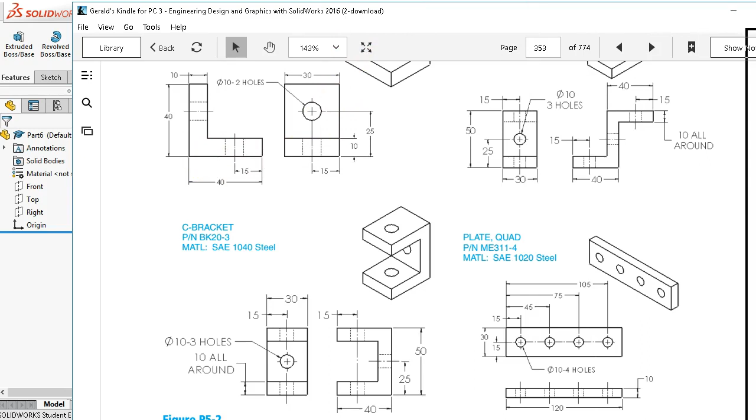Let's see, we're adding that to the outside, so that could be additional geometry. Not quite doing all of those. If we overlap them, that wouldn't hurt anything. So pretty much this 40 by 10 piece is a good way to start, or at least my first guess. Alright, so if I go into the front and open up the sketch,

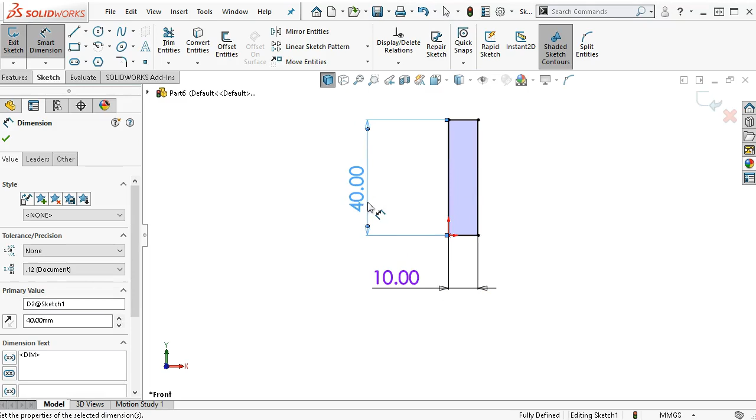and again, this is just a different strategy, a different way to approach and show some of the capabilities of the configurations. So we're 10 by 40, and so that makes all of this optional. So one of the things that I can do is with the split entities, and apparently I added one up there too. So I really like my split entities.

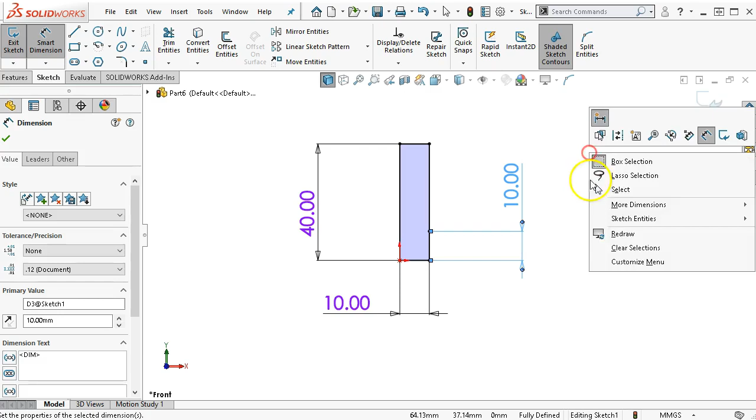We're going to split that. And then I can either make them equal or put a separate dimension. Alright, so that doesn't help or hurt anything right now. It's just to be my default base. And we'll do an extrude. And I will stay with the midplane and the 30 millimeters to get that started.

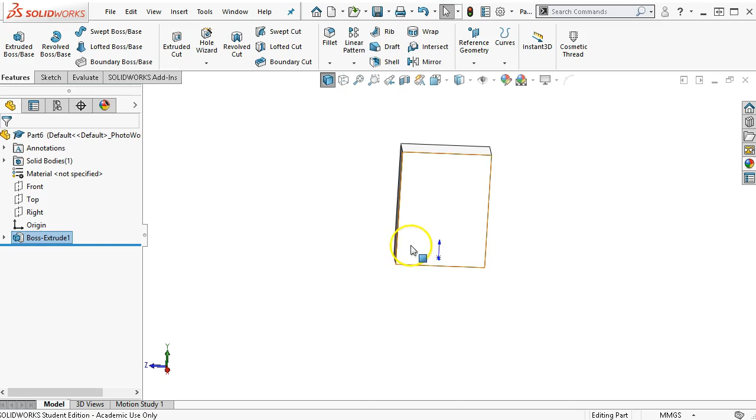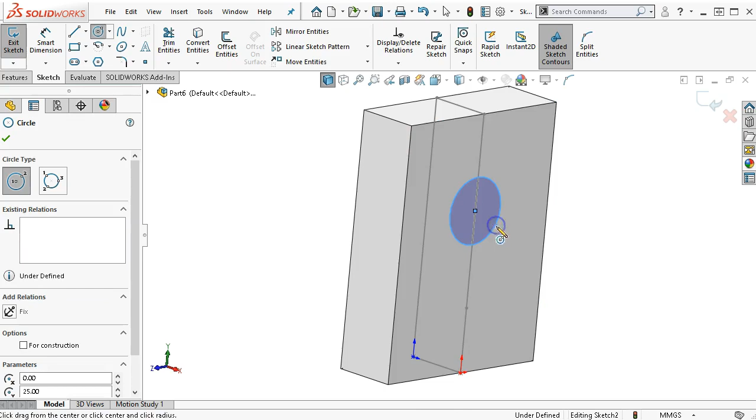Alright, and then for the sketch, so that line, even though I split the sketch and I can see that point in the sketch, it doesn't really help or hurt anything. So one of the things, if I were to show that sketch, all three of our configurations are going to have that common element in it. So we'll set, I gotta really find those properties and figure out where that symbol's at. Alright, so through all, and then that gives me my base to start.

Alright, so at this point we'll give it a save, and I'm going to call this just the generic bracket. Each of the configurations will pick up its own. Alright, so going into the mix then, the default is just my geometry. Add configuration will be the, let's go with the L bracket first. And I don't really have a description that I can think of.

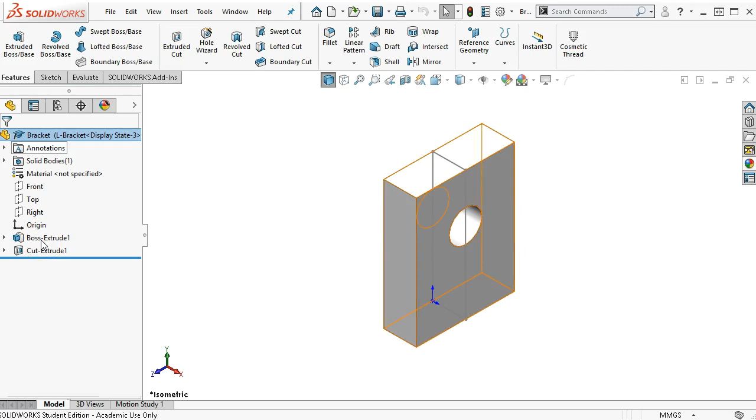There wouldn't be anything wrong with just going right down the line since I know what they are, adding them in, or coming back to the boss extrude and see if it will allow me to configure the feature and just go through and add the others, even though I'm not managing geometry at this point. And then once we hit enter, then it goes to the next line and I can do the Z bracket,

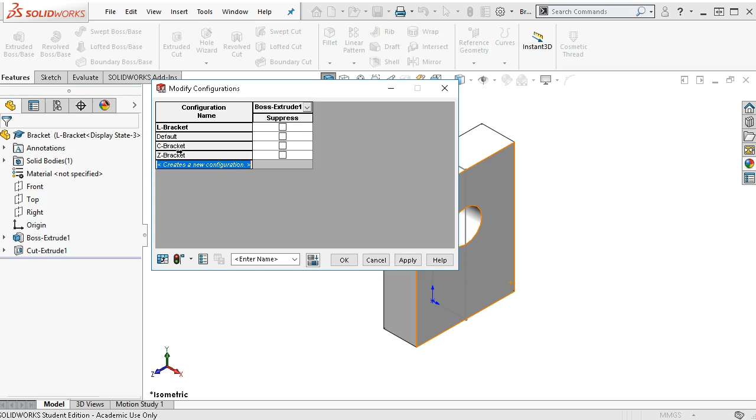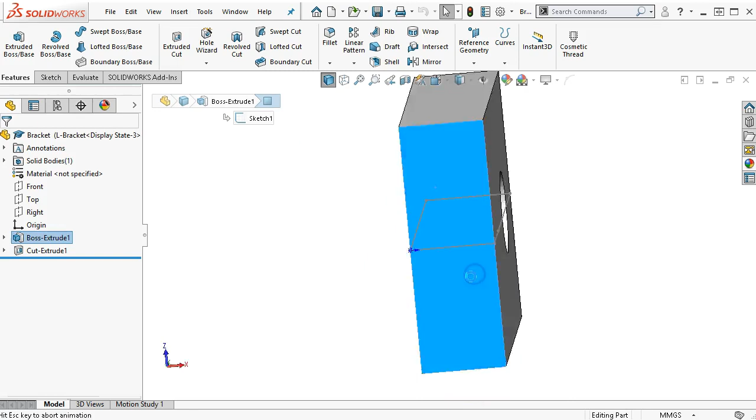All right, so my geometry for the L bracket. And this is kind of a cumulative process, and we're going to have to check because at different levels as we add geometry, they may or may not suppress correctly. So on the bottom of the part, I'm going to open up a sketch and I'm just going to utilize that existing geometry. And I don't want to make this overly complicated, so I'm not going to include the holes. Alright, and that gives me the depth of 40.

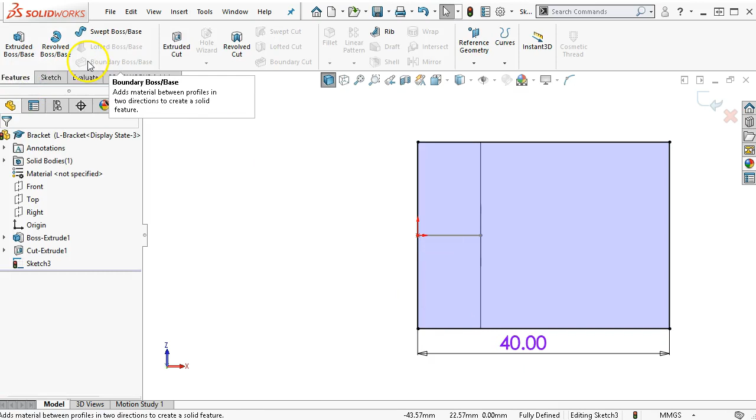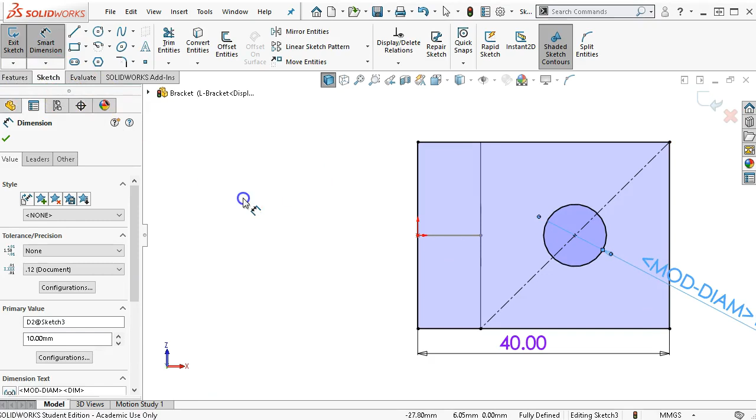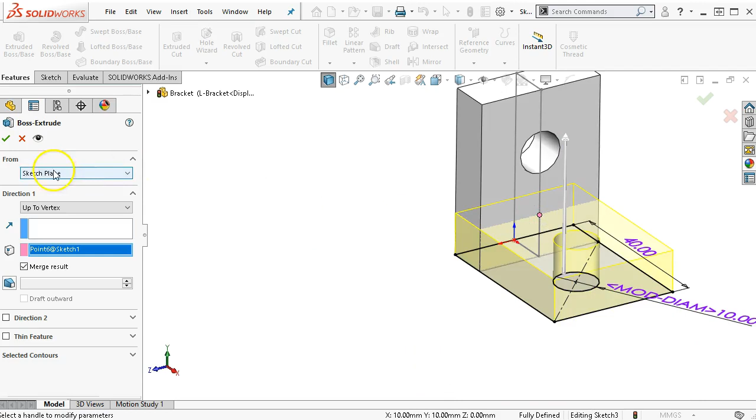Need the center line. And we'll go back for the circle and set it to 10 millimeters. And then when we create the extrude, one of the reasons that I did the split line was just to illustrate that I can go up to vertex for its height. Right, so that gives it a stopping point that is included in the first sketch and that we could drive.

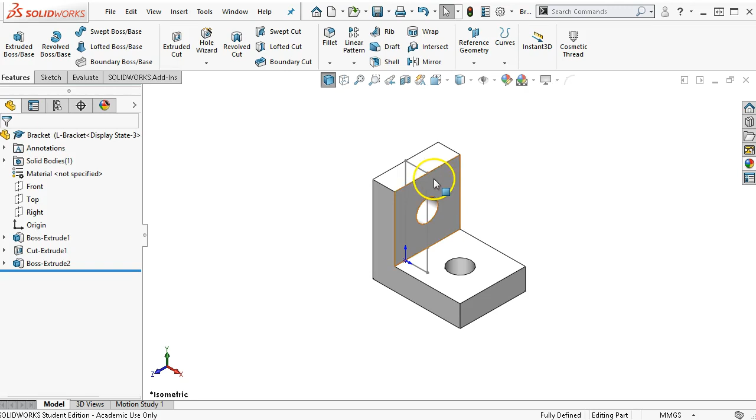So if this was a full layout, I might go back and do the contour and region approach and include a 10 by 10 at the top if I needed to draw that much. And because this is an overlap, positive into a positive, it doesn't really do anything out here. I could have drawn my rectangle right to the edge and had the same effect. It's just pretty much a what you see and how you see it when you see it kind of thing. Alright, so that gives me the geometry for the L bracket.

For the C bracket then, let's go this route, so that disappears. And that's not a surprise, depending on how we set. So I do want to unsuppress that geometry for the next. Because it was not unsuppressed, or it wasn't included in the creation of these, it's not going to be there. So if I'd come back after I'd created this, then it would add that into the next mix.

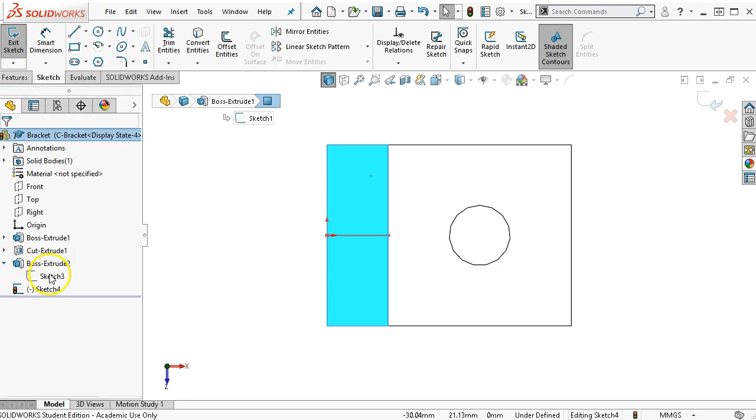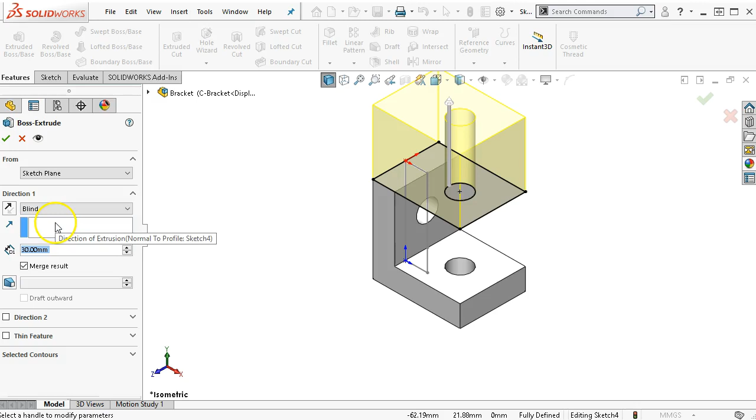Alright, so we'll open up the sketch, and pretty much, if I wanted to, I believe I can highlight sketch 3 and do a convert entities, and it finds all my geometry, and then the features. So this would have been the advantage of having that extra sketch, was to go up to vertex again. But I didn't think that far ahead, and I don't want to go back and generate it now, so we'll just put in the 30 millimeters for the height.

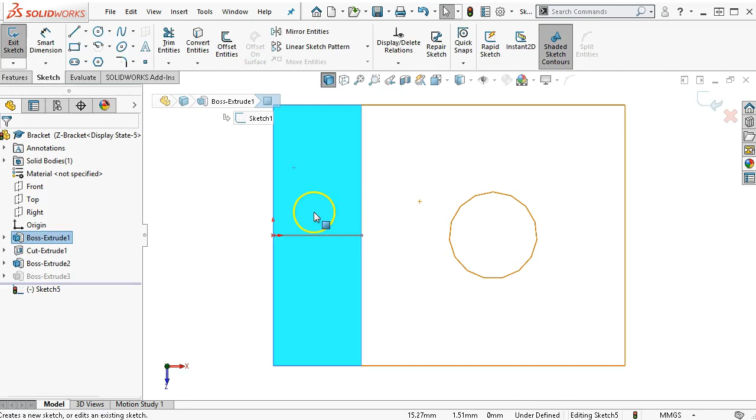Alright, so it gives me the C bracket, and then we can go back to the Z, and again, boss 2 and 3, I'll unsuppress. And so the opposite is true. If it included those in the next configuration, which can sometimes create errors, then I would have to go back and suppress as I go through this process. All right, so configurations are controlling dimensions and suppression states, and also if we have the display states on the colors of the items. All right, so the last one will be to create our geometry for the Z bracket.

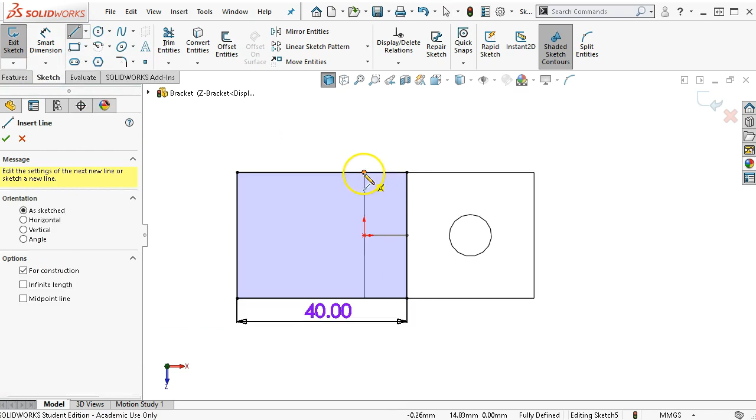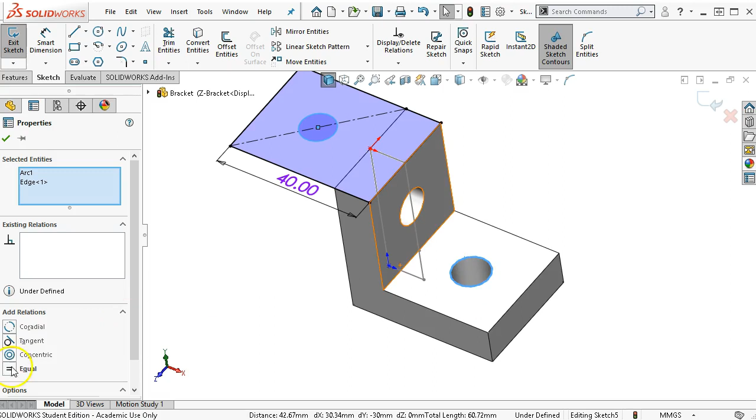And we'll put that in, go to the dimension, pick up a center line, pick up our circle. Let's see if we can grab that existing. Alright, so can't get it right there, but if I make sure I find the edge, I can set those to equal. And then this would also, if I was doing enough, I would want to consider doing an equation for the hole sizes if there were variations.

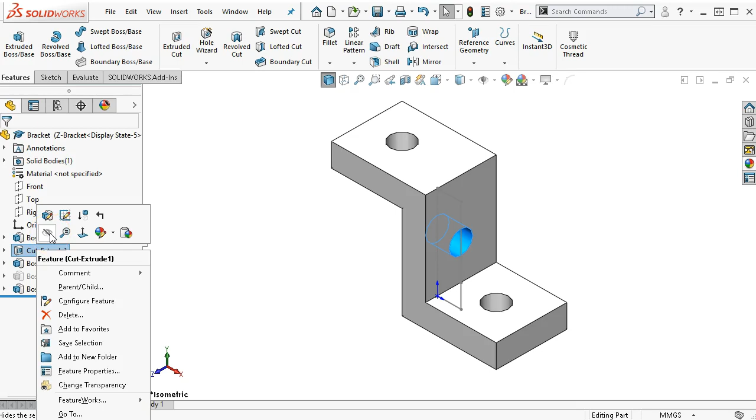So one of the things bringing up the equations now is that if I'm doing configurations and I'm going to manage this out of the configurations, then I want to be careful with the equations that I don't create circular loops or cause problems. So let's hide the sketch. And then if I, on the plate example as we go in, start using the design table, I definitely don't want to. Oh, got the body. Let's show the body and hide the sketch. Alright, and then we'll double check that it hit all the way through. And the L bracket. Alright, so in that case I'm just going back and hiding and showing.

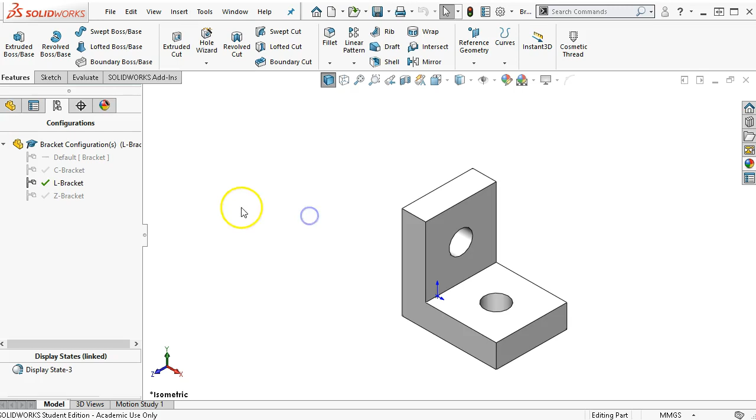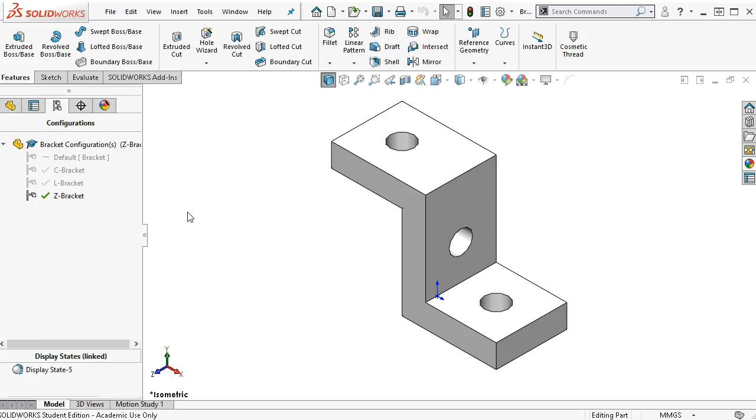So in the case of the design table, I would want to control any equations out of the design table rather than setting the equations in the part. So there's a lot of logic. There's kind of a matrix decision tree going on with this set that tries to avoid some of the problematic issues that can arise.